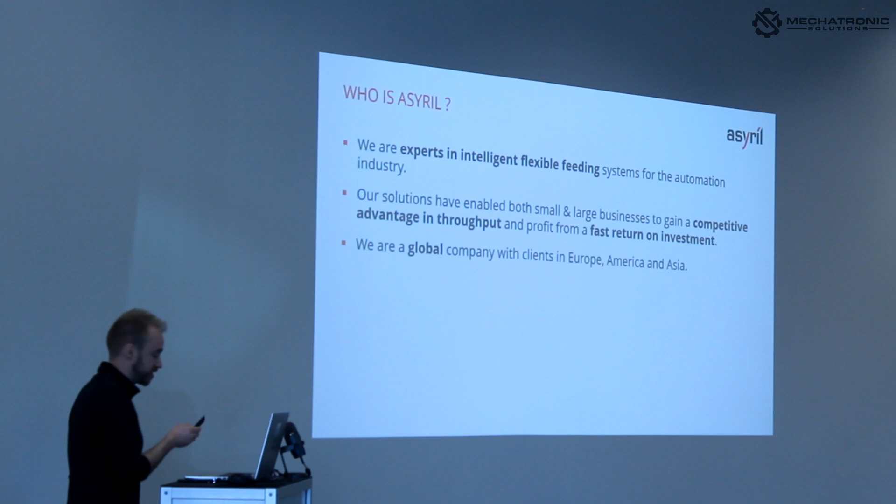I will get to specifically what we do in a minute, but we are a global company. We started in 2007, and we now have 60, actually approaching 65 employees. This slide's a few months old. We've also very recently opened an additional 5th office in Germany.

So we're headquartered in Switzerland. We've got an Edina office 25 minutes south of here, and we've got Singapore, Japan, and Germany as well.

So Asyril is a flexible feeding company. We make these feeders that vibrate parts around for pick and place. We actually started in 2007 with a big Delta robot, which slowly moved into a smaller Delta robot.

And then we made this in 2011 cell for palletizing with our ASYCUBE and a Delta robot in like a little package cell. But as we started to grow and realize where our fit in the market was, we decided not to compete with these super precise small robot companies like Mechatronic and to start just focusing on the flexible feeding because we really had a niche product there.

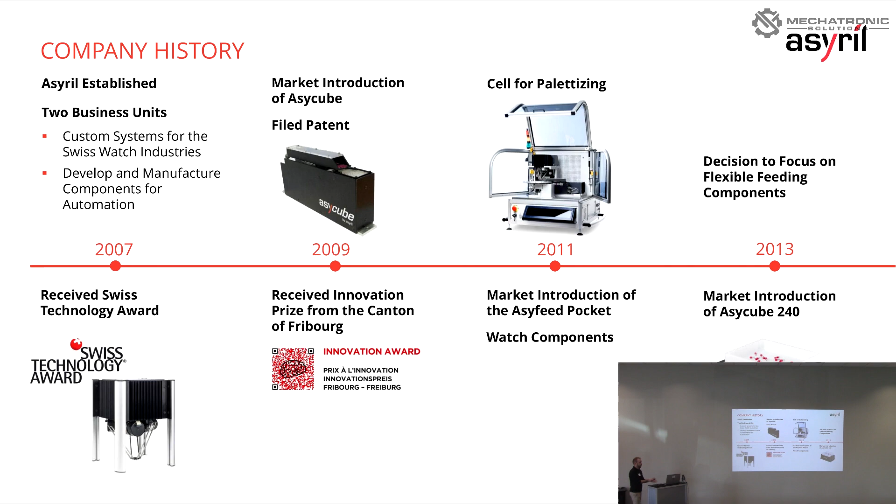We actually have a patent on our 3-axis vibration technology. So we decided to really focus in on that and kind of stop producing robots. Now we're a complete flexible feeding company and control system that we add as well.

So moving through the ages to speed it up, we opened up this center in Edina, which I am now the manager of, and Connor is one of our application engineers. That was in 2019. I started at the very beginning of 2020, so I've been here for 3 years. At that moment, we introduced our control system for ASYCUBE, which we call EYE+.

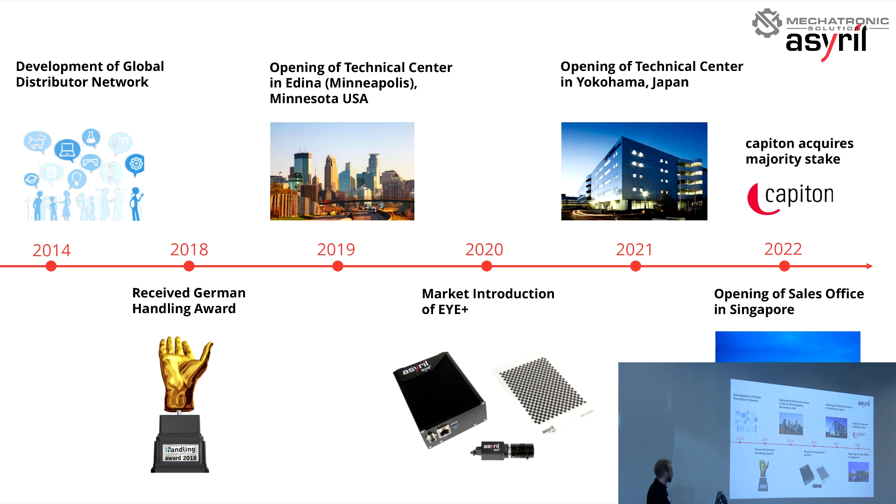Then moving through the ages again, we opened up a couple more offices in Japan, Singapore, and now Germany. Very recently we became acquired by a company in Germany called capiton because they want to help us grow even faster. When I started 3 years ago, we were 30 people, and we're already almost to mid-60s.

So, what is flexible feeding and what's the problem in production? Well, you have to get parts from bulk typically and spread them out into a singulated fashion so that a robot can pick and place and automate the parts.

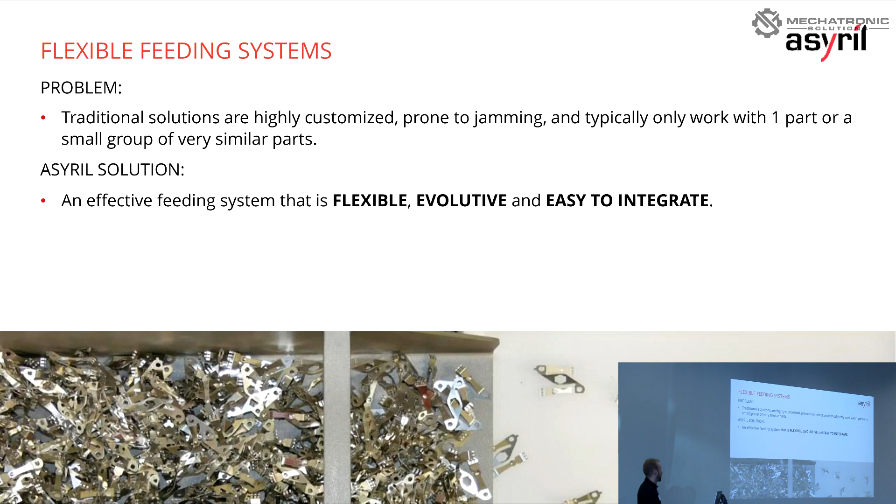The problem is that most traditional solutions are either highly customized, expensive, prone to jamming, or typically will only work with one part or a very small group of very similar parts. Our solution is to have an effective feeding system that is flexible, evolutive, and easy to integrate. We want to be able to run all of your parts maybe with one machine.

So I'm going to give you a quick summary video here of what we're about to go over in the next 30 to 40 minutes, but this will kind of sum it up for you.

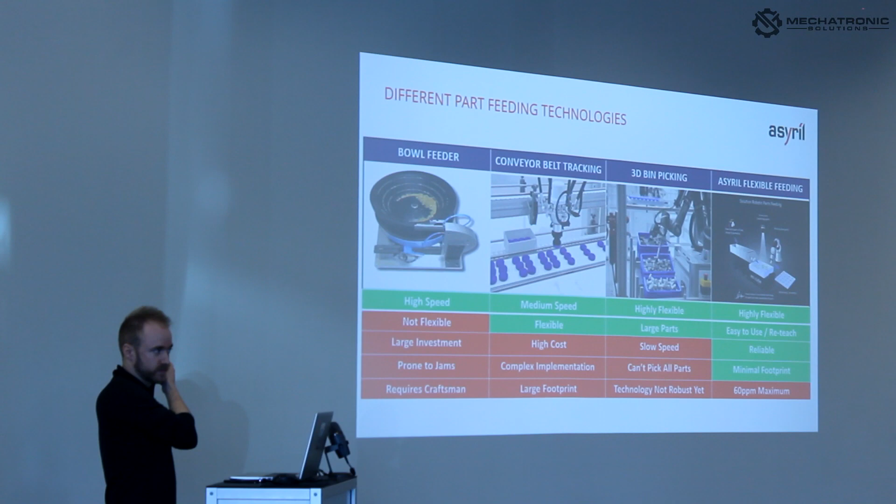Actually, I'm curious, how many people in here have never even heard of flexible feeding in general? So you're all pretty... two? Okay, but most of you are pretty familiar. What about Asyril specifically? Anybody not heard of Asyril? Oh, cool. So I'm talking to a bunch of experts here.

Well, our technology, the one on the far right, which we call flexible feeding, is kind of complementary but a little bit competitive to these other technologies. Traditionally, bowl feeding is always kind of the tried and true method. It's high speed. You can design a bowl to spin up just about any part, but they're not flexible. They're really designed for one specific part, and you can't really do super tiny parts.

So they're also prone to jams. They require really specific craftsmen to kind of fix. From there, there's also conveyor belt tracking, which are a little bit slower than bowl feeders, but they're also quite flexible, though they have large footprints, a bit more complex, and higher cost.

You have 3D bin picking technologies, which are cool, but I think they're not quite there yet. They're much slower speed, and they can't pick every part from the bin usually, but they are highly flexible and can handle very large parts.

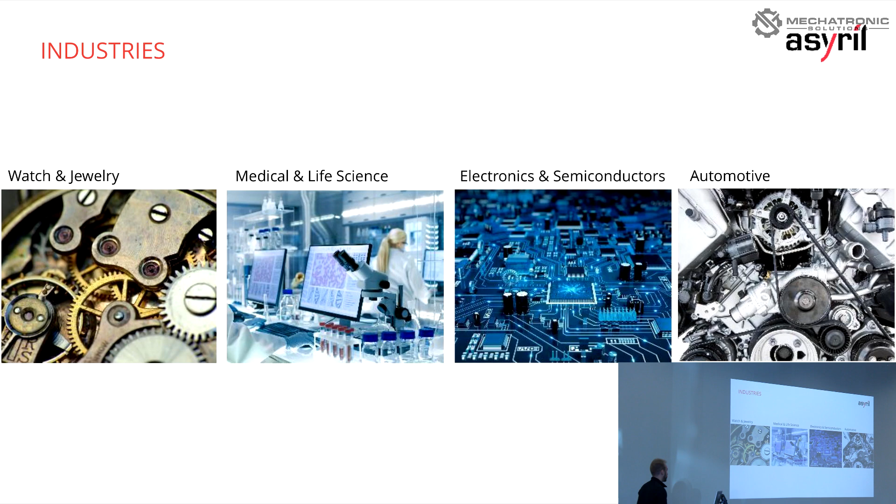Asyril, being a Swiss company, started in the watch industry. That's where we got really big with tiny watch parts, assembling parts for companies like Rolex. Then branching out to the US, we built our med device market share because Minneapolis is the hub for that. We also do a lot in electronics and semiconductors, and now even branching into larger parts in automotive.

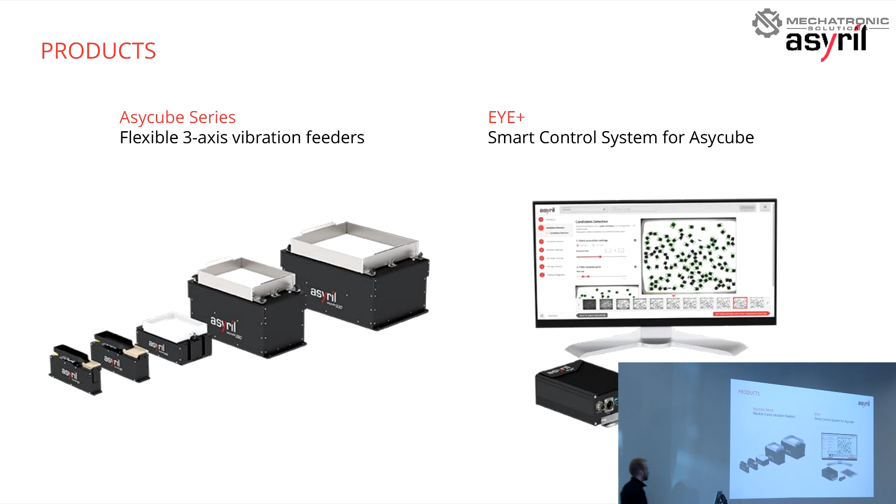So in summary, Asyril makes two products: our ASYCUBE series of feeders, and our EYE+ smart control system, which is designed to be the partner with an ASYCUBE. Connor will talk about EYE+ in a minute. I'll go into a bit more depth about what ASYCUBEs can do for you first.

ASYCUBEs have what we call 3-axis vibration technology, where we can vibrate parts in literally any direction we want. This is unique to us and we have a patent on it. They're meant for rapid changeover and flexibility, obviously it's in our name, and they're meant to be really easy to integrate. Across our 5 sizes, we can handle parts anywhere from about 1/10 of a millimeter to about 6 inches.

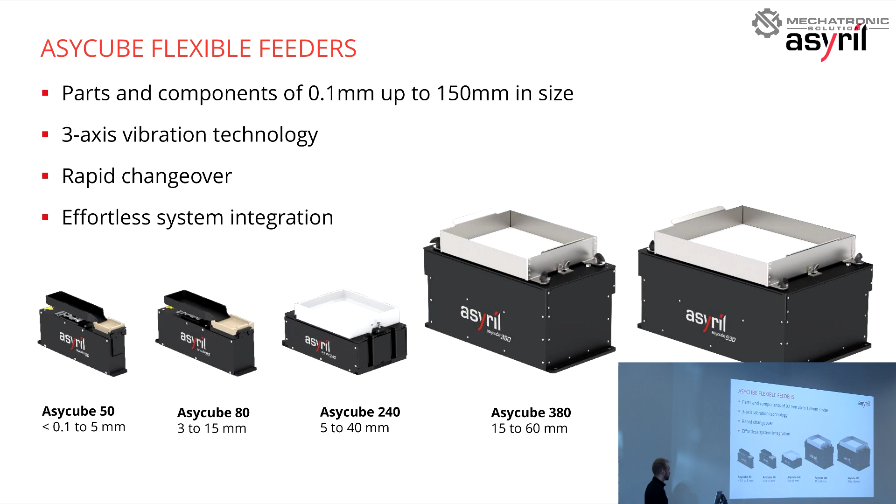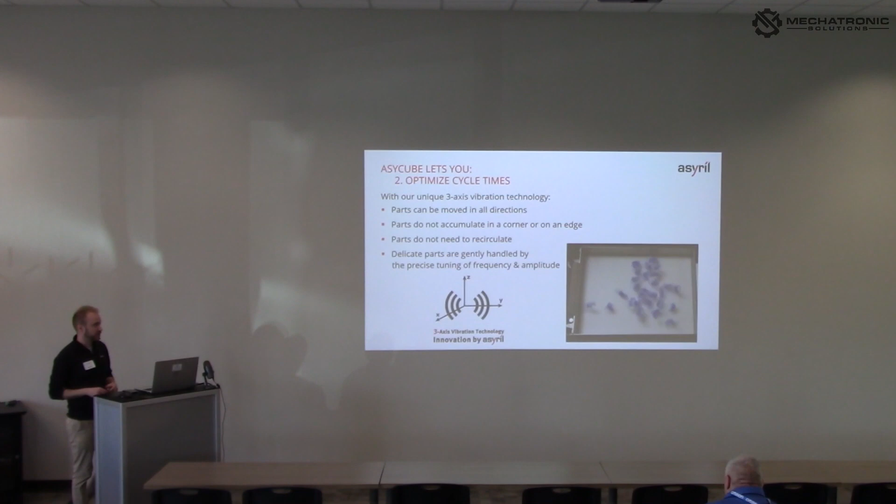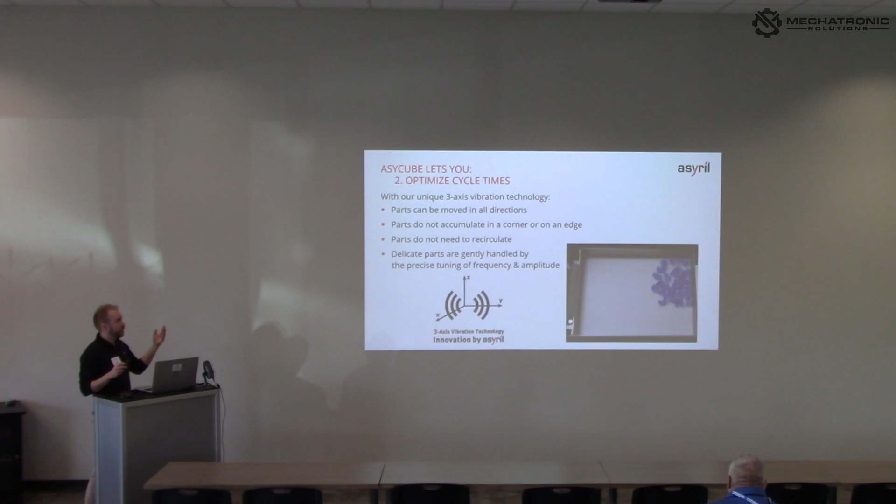Here's what I mean by this 3-axis vibration we have a patent on. We can move the parts in any direction across the feeder, and you can do that with or without feedback. Connor will talk about that, but our vision system can actually detect where the parts are and bring them away from the edge. So if they're clumping in a corner, it brings them back to the middle. Why is that important? If you don't have parts piling up in the corner, and instead you're evenly spreading them across the whole platform every time, you're maximizing your chance for them being pickable, and ultimately maximizing your chance for a high cycle rate.

Here's one more video really highlighting that. You'll see this robot come pick and place the parts, but then you'll see someone manually push the parts off to the corner, and the camera will recognize they're in that corner and bring them back to the middle. This is all happening automatically, and adding that kind of control manually with other vision systems is a bit more in depth. So this is how we make flexible feeding also very easy.

ASYCUBE also lets you detect parts with high precision. Each ASYCUBE comes with an integrated backlight, and we also have optional front lights we sell in case a part really requires some additional lighting. You can have many different colors of backlights for precise part detection.

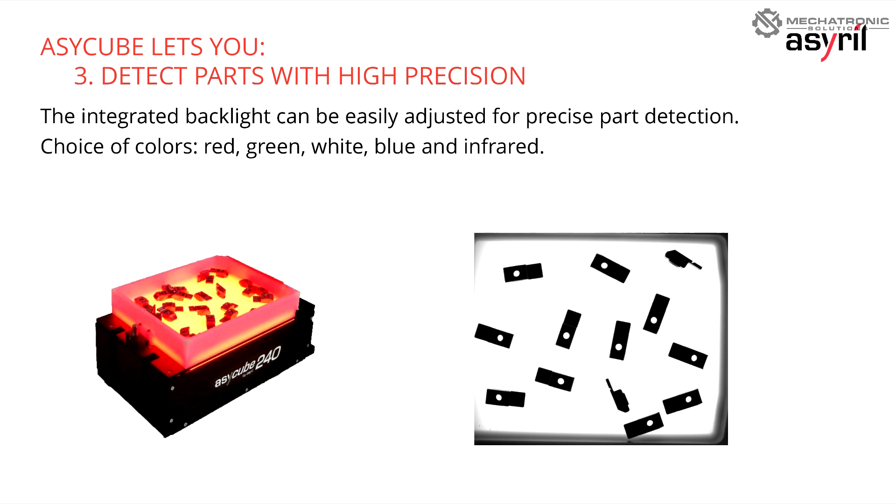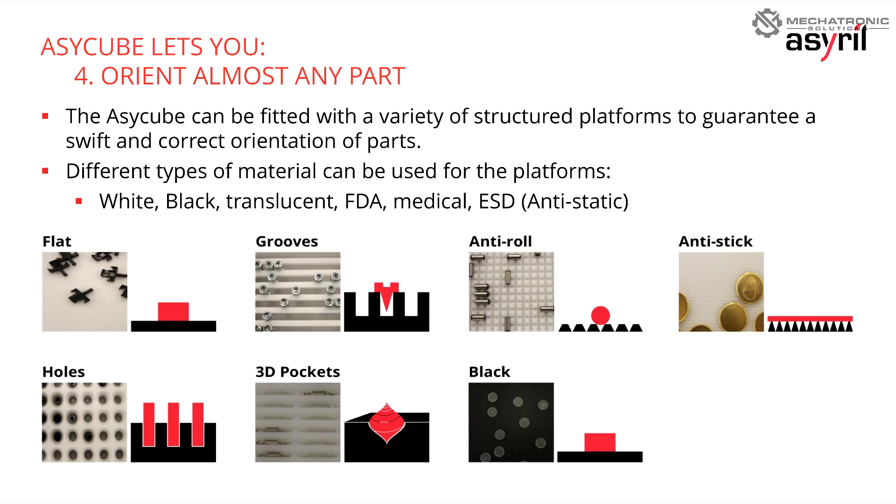Another example of a useful platform is an anti-stick plate, where we have micro grooves to reduce surface friction on the top. So if you have a part like a coin, we can make the parts move more efficiently. And when you can make parts move faster, you can get them to the middle faster, spread them out faster, and again increase your cycle rate. ASYCUBE also lets you orient custom parts, like these pins that require a slot to be held by a flange, or these cylinders that need a hole to be oriented vertically.

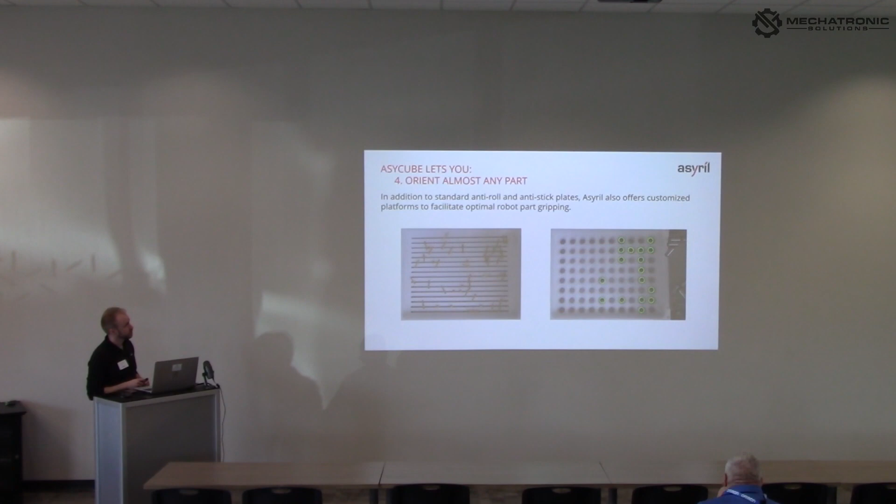ASYCUBE also helps you reduce changeover time. We have a super easy way to change over platforms with 4 thumb screws on our larger ASYCUBEs, and a simple 1 mechanism plunger for our small ASYCUBEs.

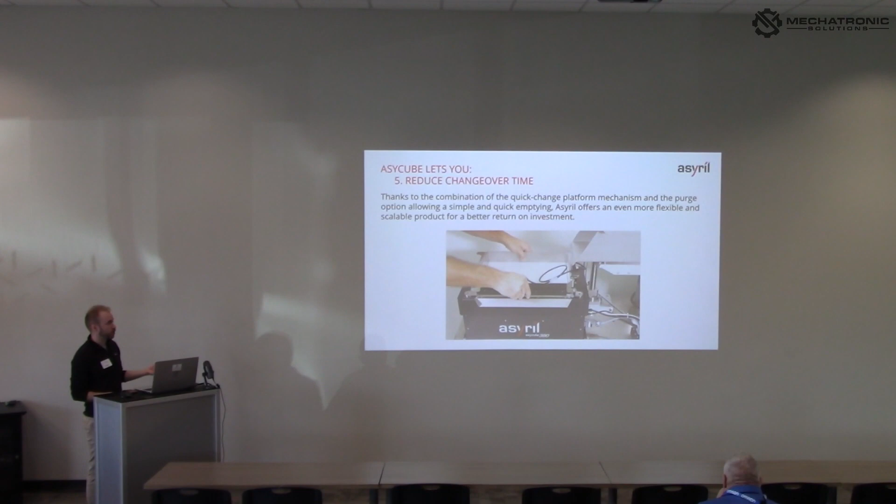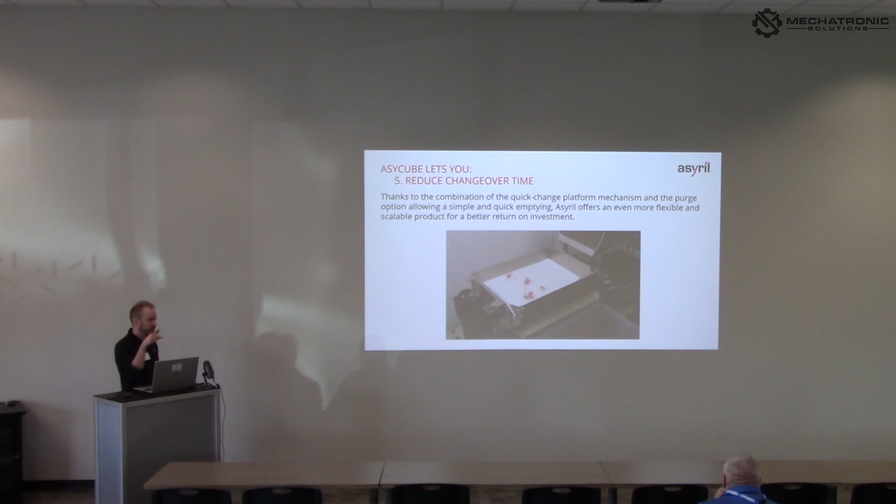ASYCUBE also lets you very intuitively configure it. Our goal and mission at Asyril is to make feeding simple for any user, so you don't need to contact support, your integrator, or your distributor. You can really configure stuff pretty easily on your own.

We're trying to change the game in software interface, making it as user-friendly and intuitive as possible. This is the software that you get with an ASYCUBE. You load it up and configure what we call the tuning parameters.

There's a laser on here. These tuning parameters let you configure the amplitude of an ASYCUBE, the frequency at which they vibrate, and the duration. These are important because a really heavy part or set of parts on an ASYCUBE would behave a lot differently than a bunch of really light parts, so they require different frequencies in order to behave at their resonance and actually travel across the platform.

So you can do live tuning, where you set the thing to vibrate continuously and adjust these tuning bars until the parts are moving really well. You can tune an ASYCUBE with no experience, probably very well, in under half an hour.

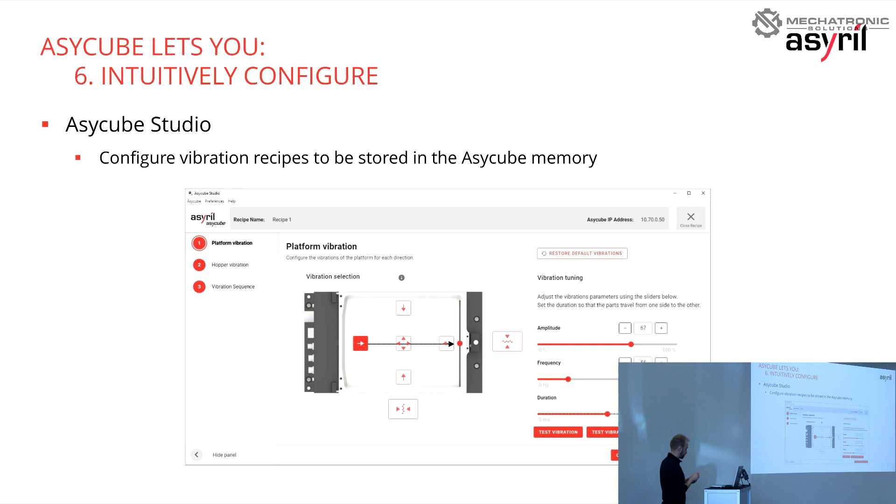Inside ASYCUBE Studio, we try to do everything simply. We have wizards to guide you through how to set it up if you've never used the software before, and we have real-time response to the vibration parameters, as I just mentioned.

We have optimized hopper management and smart centering. We can partner with third-party vision systems to have 2 parameter inputs where they send us the quantity of parts. You'd send the quantity over and say, I've got 7 parts left on the platform, but you told me 50 was the optimal amount, so I'm very underfilled and need to send a longer hopper vibration command to refill. The idea is you're always keeping an optimal fill level on the ASYCUBE.

So we can do that with third-party vision, and we can also do smart centering. We have a parameter where you can send the center of mass from your Cognex camera or something, and then use that information as a trigger to say which direction the ASYCUBE needs to vibrate to bring the parts back into the middle.

It does get a little bit involved, and Connor will talk about how EYE+, our control system, makes this literally automatic. The idea is that there's no experience required to use an ASYCUBE.

I do have a video showing a recipe creation, but I think that's maybe not necessary unless anybody really wants to see it. No, we'll just stay high level, so we'll skip over that.

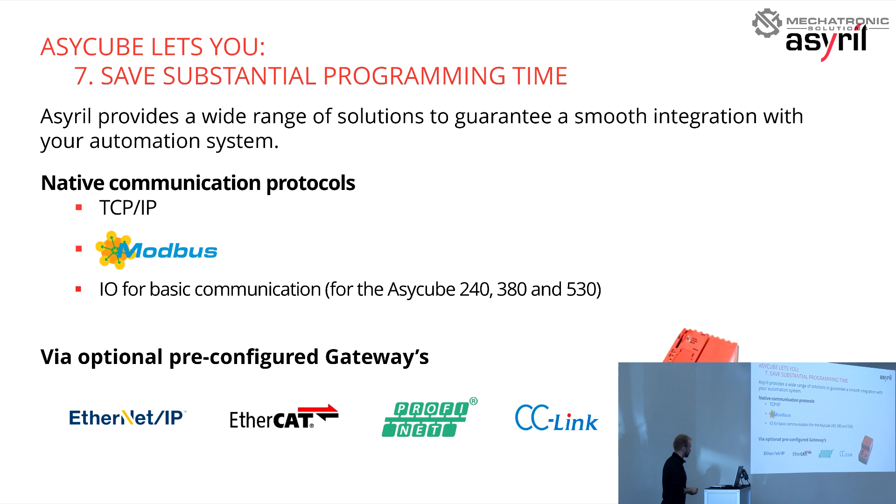ASYCUBE also helps you save programming time with our plugins. We have plugins for every major robot brand, and we're also compatible with others. We actually developed plugins with drag and drop commands to make ASYCUBE control even easier inside these. Here are a couple example teach pendants from different robot brands.

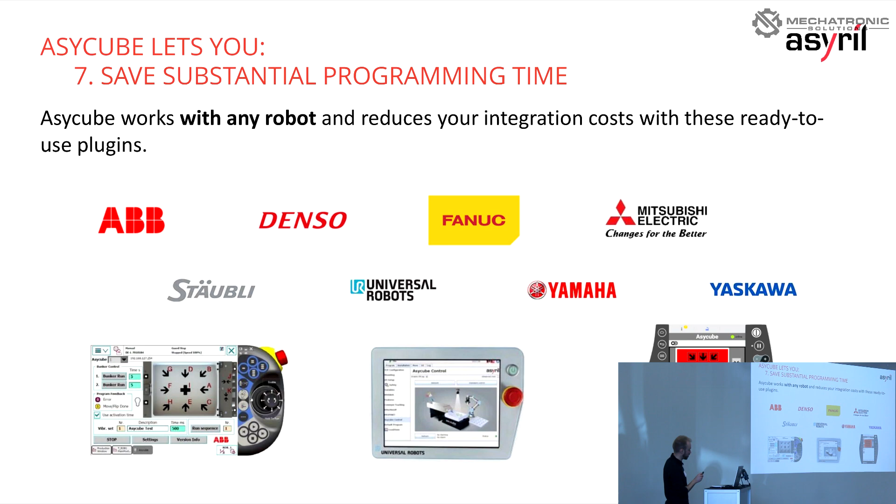So that's flexible feeding in a nutshell, and our ASYCUBE family in a nutshell. I'll take questions about those at the end. I'm going to let Connor continue on with our EYE+ product, and then we'll go from there. Thank you.

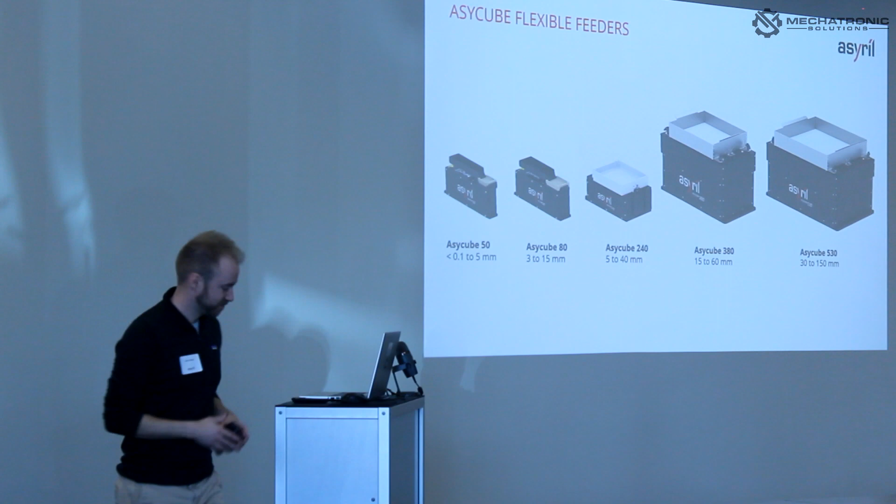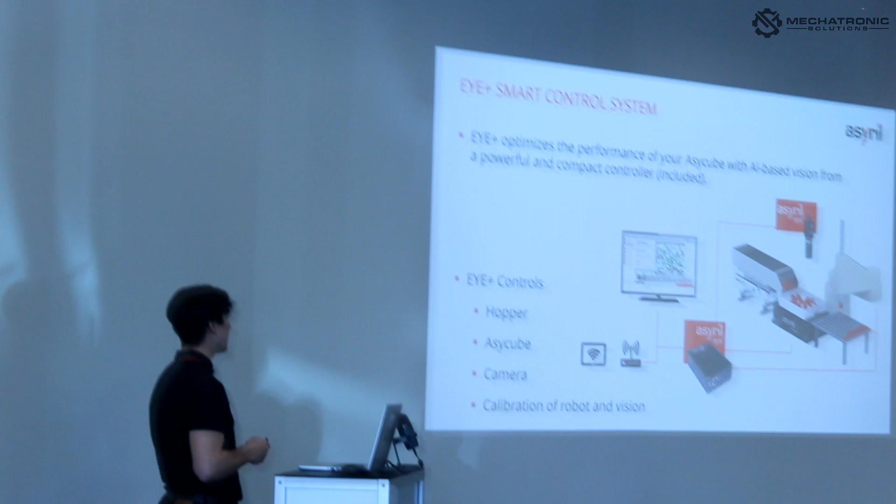I'm going to go over our EYE+ smart control system. It's a vision control system that Asyril has developed to work in tandem with the ASYCUBEs, like Josh has said before. We put a large emphasis on ease of use, compatibility, and configurability. So what is EYE+?

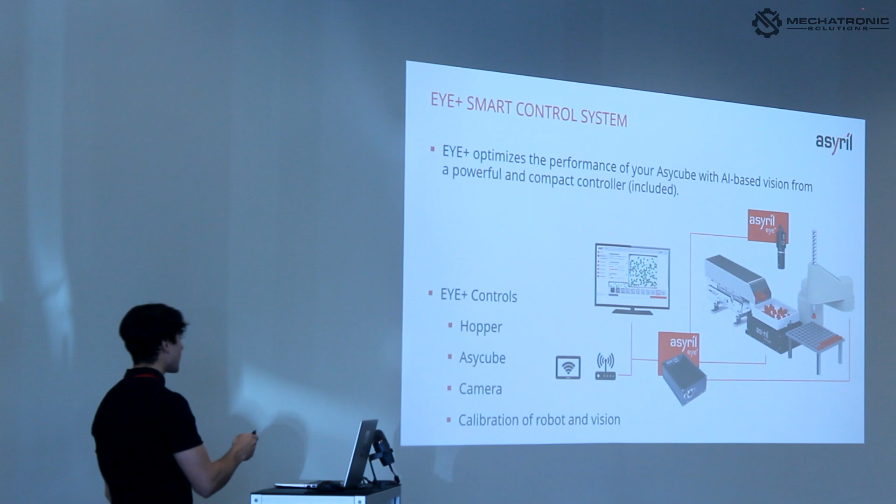EYE+ Smart Control commands the hopper, commands the ASYCUBE, commands the camera, and also has easy setup wizards for calibration of the robot and the vision system. The nice part about EYE+ is that you do not need to communicate to both your vision system and the ASYCUBE system separately. You just communicate to a single EYE+ controller, and that'll manage everything on the ASYCUBE, keeping your lines of communication as easy as possible.

What's in the box? The EYE+ system comes with a camera and a lens. We use predetermined lens and camera configurations, so you don't have to look too hard on which lens and configuration may be required for your application. We have a set quantity that we found to work best with, let's say 95% of parts. In specific applications, we do have tools that enable you to accommodate other parts, like mirrors and whatnot, but those could be discussed independently.

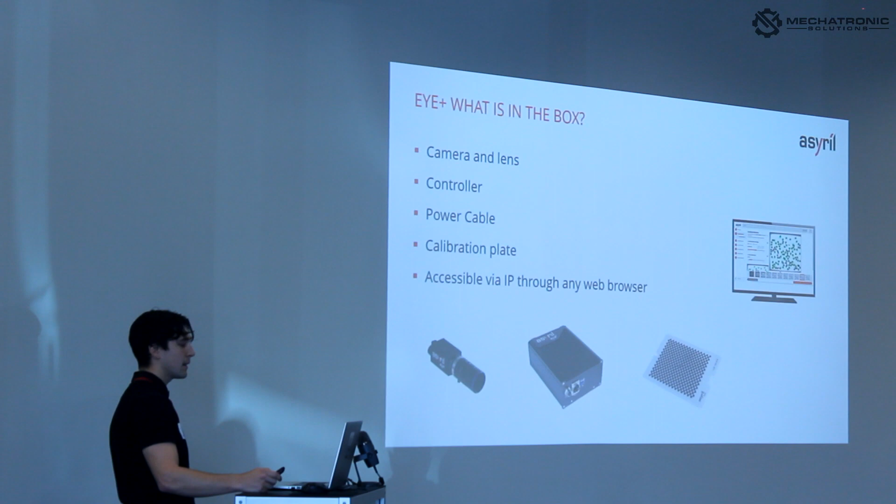It comes with the controller, a power cable, a calibration plate, as you can see on the bottom right, and it's accessible via IP through any web browser. So as long as you have a computer, you don't need an internet connection, you can operate on EYE+'s network and connect to it via its IP with an Ethernet cable.

We like to think that EYE+ is a fun, out-of-the-box experience. As plenty of you are probably aware, industrial vision and part picking in general can be a complex problem to solve. There are definitely more complex solutions as well, like line tracking or bin picking. So we like to do the best that we can to ensure that EYE+ is easy to use.

There's no previous vision experience required. It's easily integrated, speaks TCP IP, Ethernet IP, EtherCAT. We have hardware items that can be included to communicate Ethernet IP and EtherCAT. It natively speaks TCP IP, a direct cable connection. All the cables come within the kit. It's accessible with any browser, like I said before.

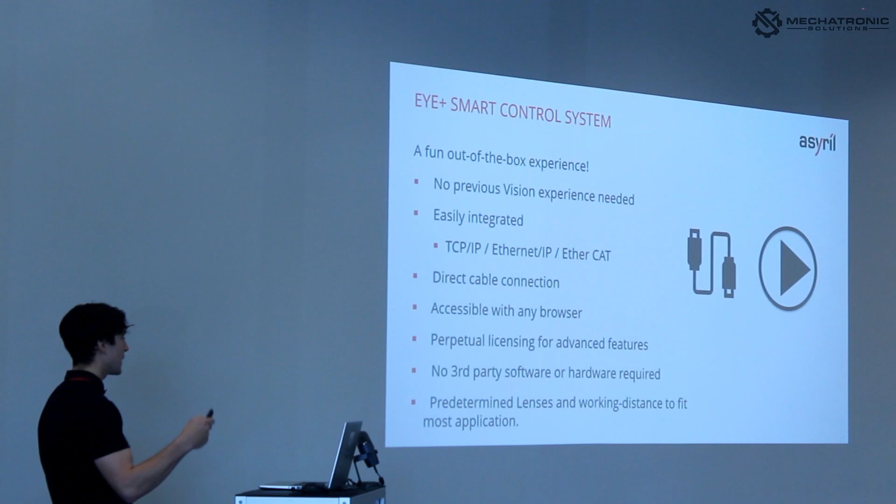It has advanced solutions like dual feeding and multi-model, which I'll go over later. It's a one-time perpetual license, so you don't have continuous licensing fees to pay. EYE+ is not a licensed software, it comes with the controller. Once you purchase the controller, you get the benefits of EYE+. There's no third-party software or hardware required if you do not need it. And then, like I said, working distances.

Like I said, we put a large emphasis on ease of use, and by doing so, we have a built-in camera calibration wizard to calibrate the camera to the ASYCUBE plate. We have a built-in robot calibration wizard, and a wizard for recipe creation that walks you through the vision teaching and ensures you have a solid result you can depend on at the end.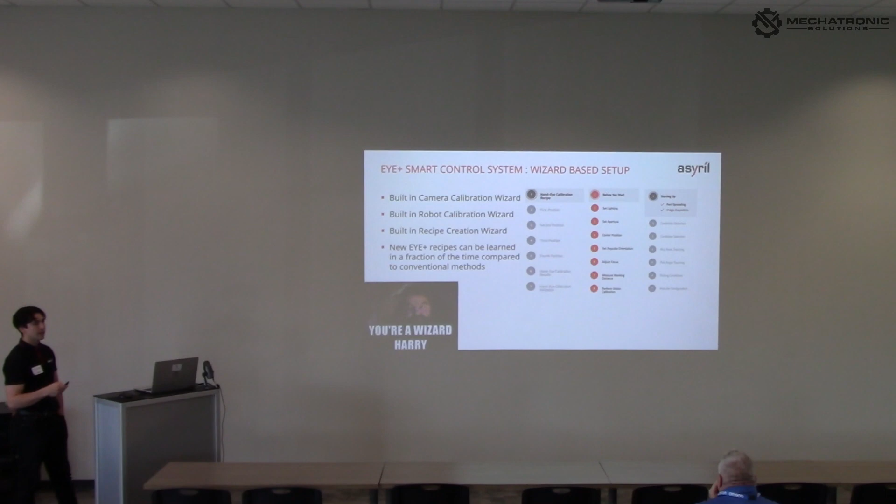And it's rather quick. Typically, it takes me less than 15 minutes to build a recipe. If you're a beginner user, maybe 30-45 minutes. But if you know what you're looking for on the specific parts, which geometries are important, that'll typically take not much time at all.

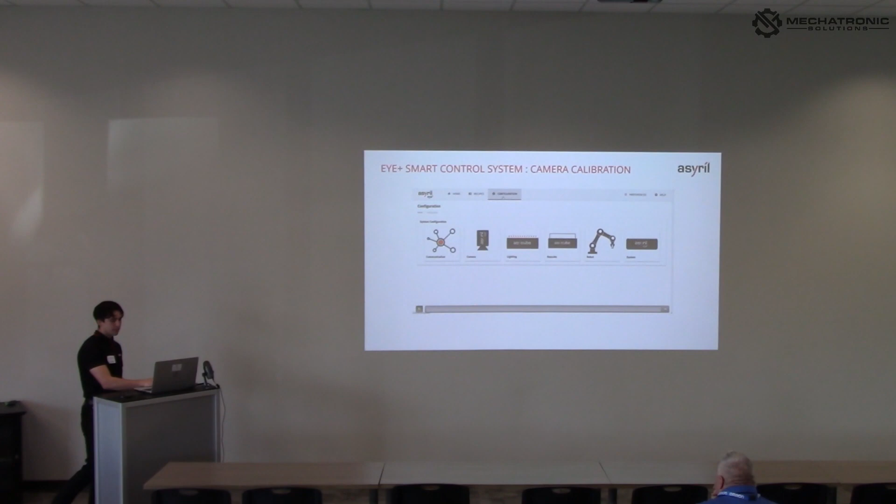I'm just going to show a quick video of what a camera calibration procedure looks like. I believe it's about 3 minutes long.

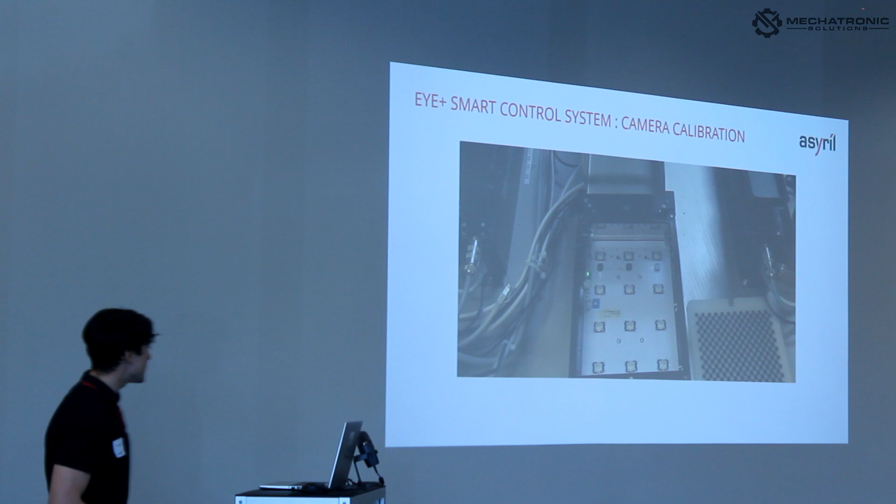This is our setup wizard like I discussed. As you can see, 9 easy steps. Set everything up and the system will configure itself quickly.

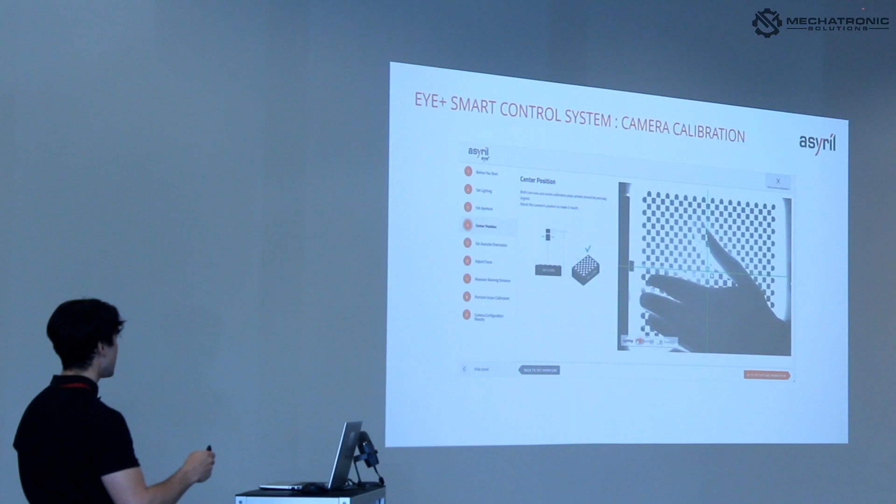Each of our lenses comes with a recommended starting aperture. Obviously, each application might vary, but we have good starting points for adjusting your aperture. And your focus is a little bit more obvious in the next steps, but for an extremely precise application, sometimes it works best to focus on a specific object instead of trying to set your focus on the grid pattern itself. Let's say a very small font, something along those lines.

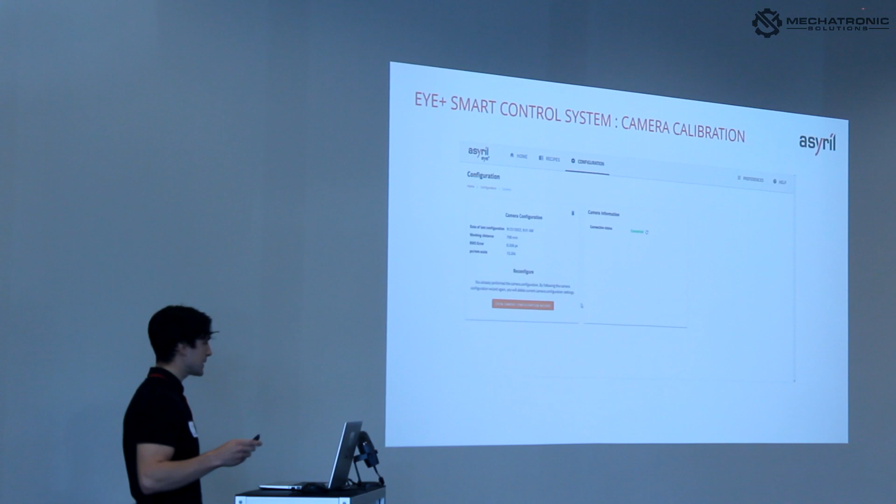So as you can see, that's a pretty quick process, a really easy to use wizard. Makes it more or less a painless, fun experience.

This is a robot calibration procedure. Similar wizard setup, steps through, I believe, 6 steps, and this helps you calibrate your robot arm to the ASYCUBE to ensure that your pick and place accuracy is consistent.

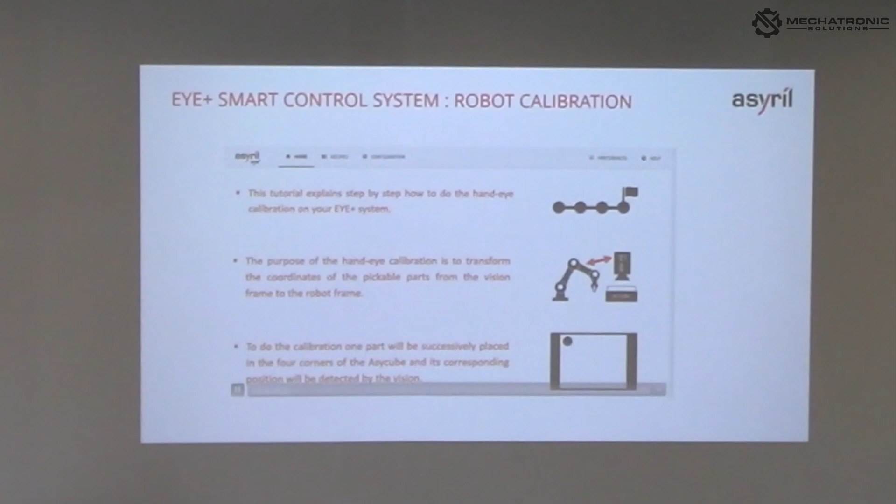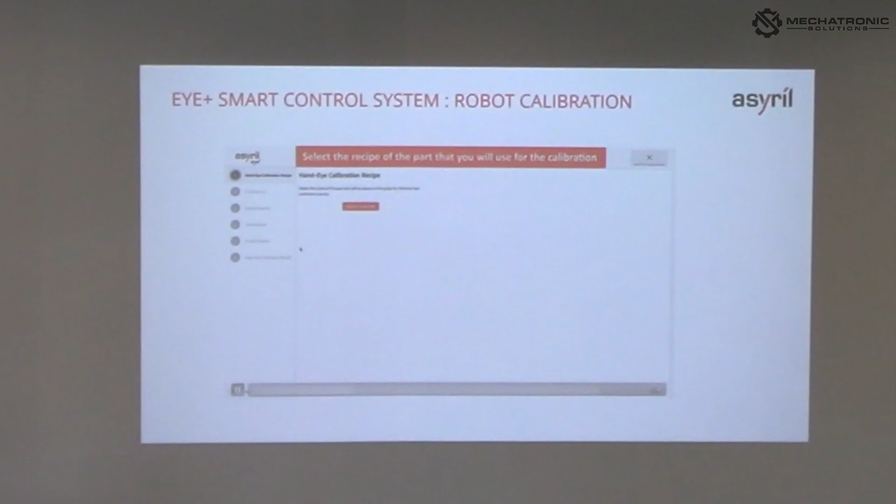What's going to happen in the video is to calibrate your robotic arm to the ASYCUBE. You'll need to place a part in each corner. The robotic arm you'll record your robotic coordinates into the wizard, and then move the arm out of the field of view. You'll take an image of your calibration part on the platform. Once you've taken the image, it'll marry the robotic coordinates to the ASYCUBE coordinates that it's picked up when it's taken the picture. You'll do that in each corner, and then it'll give you an accuracy at the end, so you'll know if it's going to be consistent enough for your application.

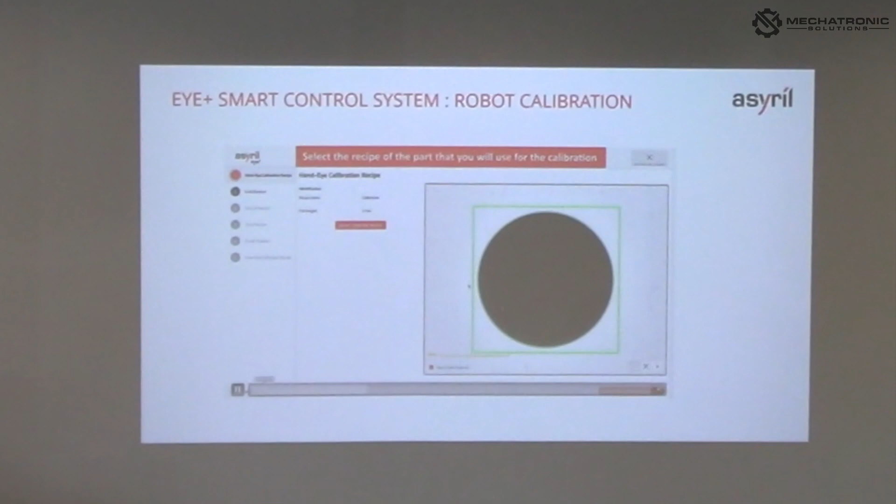So to save you guys some time, I'll let you see what the robotic arm placement looks like on the first position, and then I'll jump to the next one.

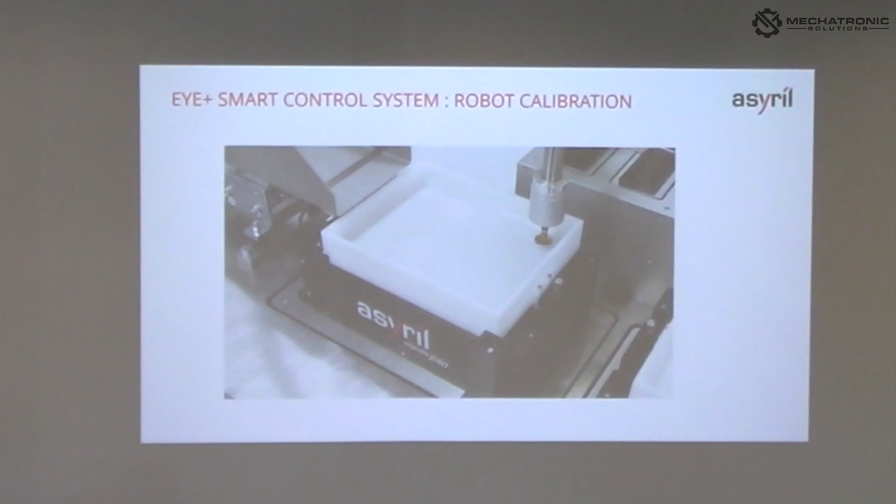This is also a process within EYE+ that can be completely automated. We have tools within EYE+ that allow you to send the robot coordinates in autonomously, so you can have the robot calibrate itself. Typically, this is what we'll do in a production application if you have to calibrate before production every day or on part changeovers. It makes it easy to use, easy to do - simple as sending a start calibration command.

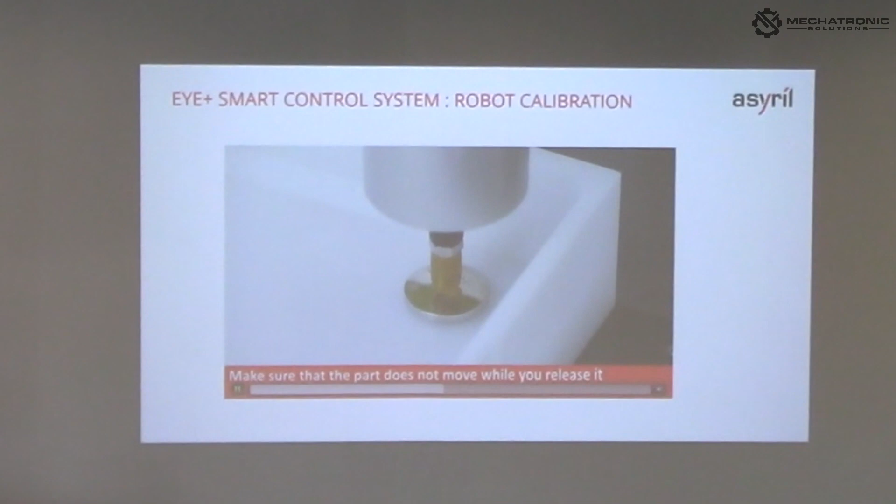Finally, our recipe creation wizard. This takes a little bit longer, and I didn't feel like making you sit through a video of that. But if anybody's interested, Josh and I will be out on the floor after this, and we can show you what that would look like. It's a rather quick process, 7 quick steps for starting up.

The second step is setting a size limit around your parts. You need to tell the system how big your parts are, more or less, based on their area. It's going to use that as the first filter.

Third step is candidate selection. This is actually an AI teaching step where it's picking up on surface finish differences between each part on the platform, and you as the user will teach it what a good part is by sorting through a handful of images, sorting the good ones into a column on the right and the bad ones into the column on the left. You swipe left for the bad ones, swipe right for the good ones.

The fourth step is pick point teaching. This is assigning a pick point, a general region where you're going to want to pick your parts from. You're going to want to highlight important features for this step that pertain to your robotic pick. So if you're using a vacuum gripper, it's going to look different than if you're using a finger gripper type of situation. For pick angle teaching, this is assigning a pick angle to the part, so each part is going to be picked at a known angle, and then can be placed accurately after.

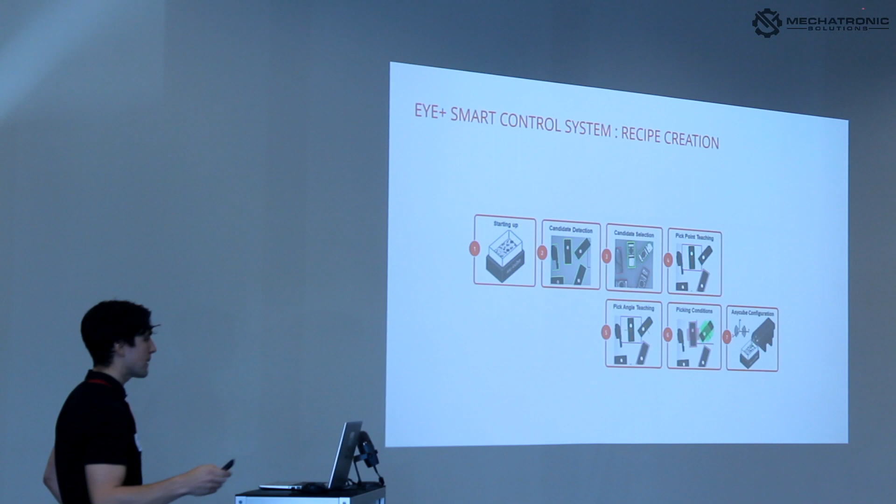Picking conditions is setting boundaries for your robot so it knows not to collide with the platform and not to collide with other parts on the platform when it's going to pick parts. You'll set a boundary around it, and a gripper size - typically you'll try to make it look as similar to your gripper as possible. That will ensure the robot will never attempt to pick a part that may cause a collision. You'll also set a boundary along the outsides of the ASYCUBE to ensure the gripper will never cause a collision with the frame of the system.

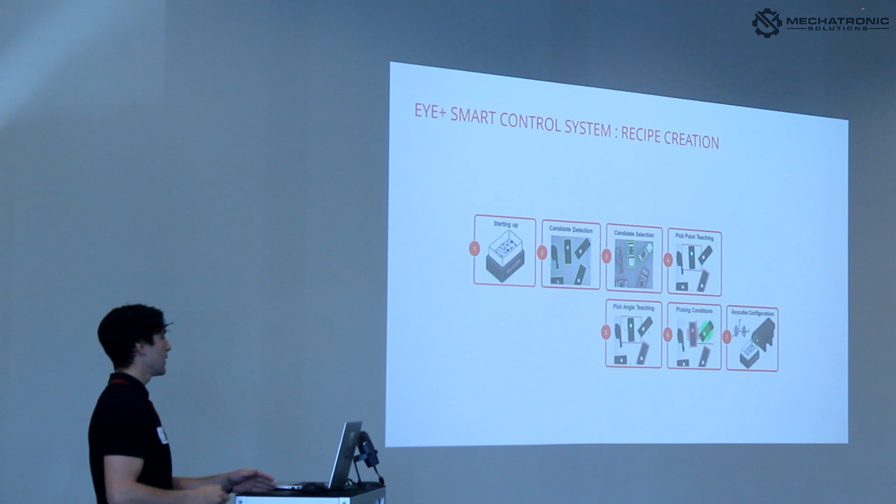And finally, like Josh showed before, you'll go through the tuning and tune the ASYCUBE just like you tune on ASYCUBE Studio, or tuning in general, to customize for each of your parts.

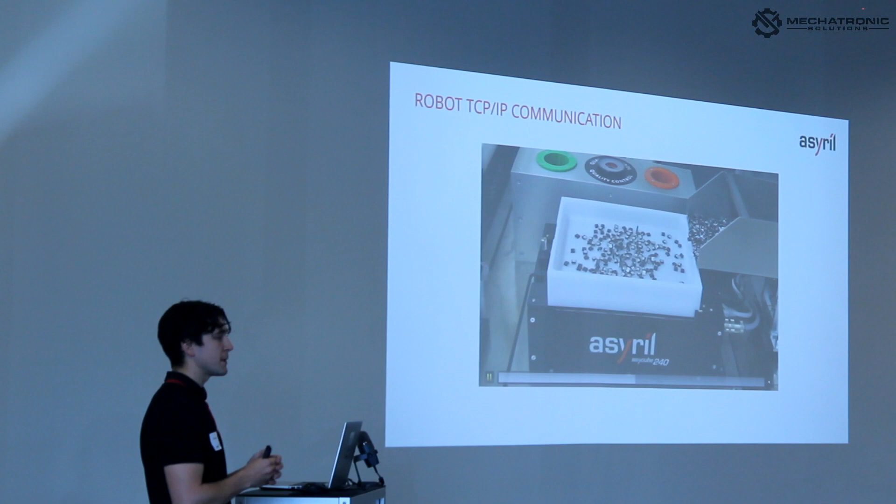For systems that we do not have plugins with, it's just as easy, except you need to define these variables. You need to tell it what a get part is, you'll need to tell it where, and the various other commands that you would use. But for a standard application, all you're going to do is start.

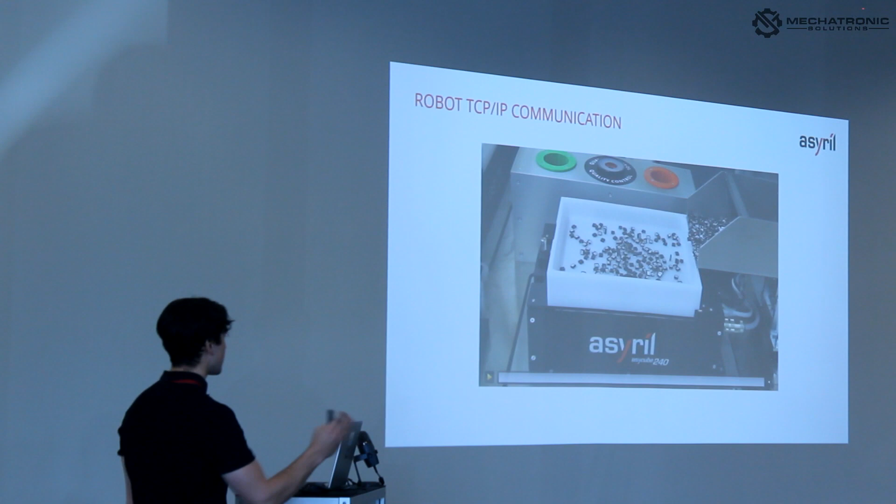You're going to start production with a recipe ID. Your robot's going to tell the system to get me a part, so get part. Once you've told it to get part, the system's going to take an image or shake the tray if it needs to. It'll take an image, determine if there's any good parts. If there's not, it'll shake it. If there are, it'll send those coordinates to your robot to be picked. And then you'll just loop that cycle to continue picking.

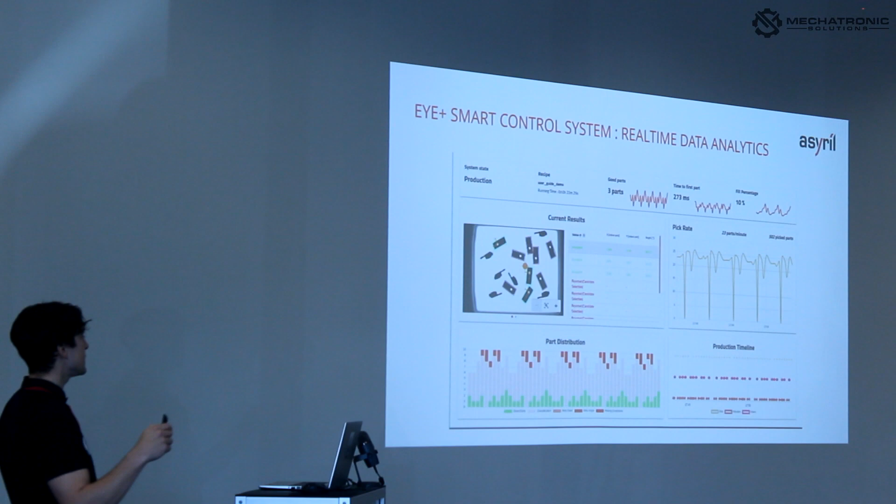Another nice tool of EYE+ is real-time data analytics. On our production homepage that you can pull up via IP address, you can access the real-time analytics to see what your production run rate is - good parts per vibration.

Good parts per vibration, that'll tell you how many parts are typically turning up good after each vibration interval. The time to first part in milliseconds, this is the time that the vision system takes to locate the first part. It does this rather intelligently. It's going to put an emphasis on the first part to get your robot moving. So it's going to locate the first part as central to the center of the ASYCUBE, and then it's going to loop out kind of like that, as it locates the other parts on the platform. And this kind of gives us the quickest time to part that you can achieve.

And then it'll also give you fill percentage to see how consistently the system is keeping the ASYCUBE at its fill rate. Other things as well, like pick rate, things like that. Anything that you may be interested in.

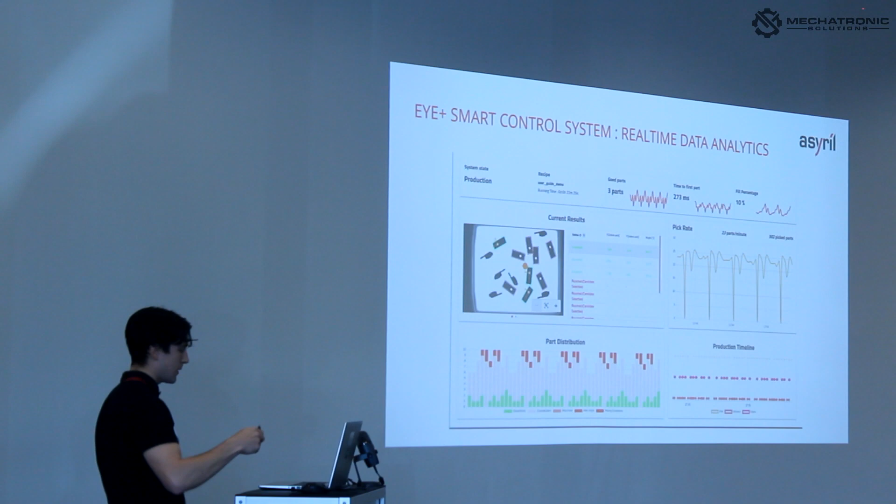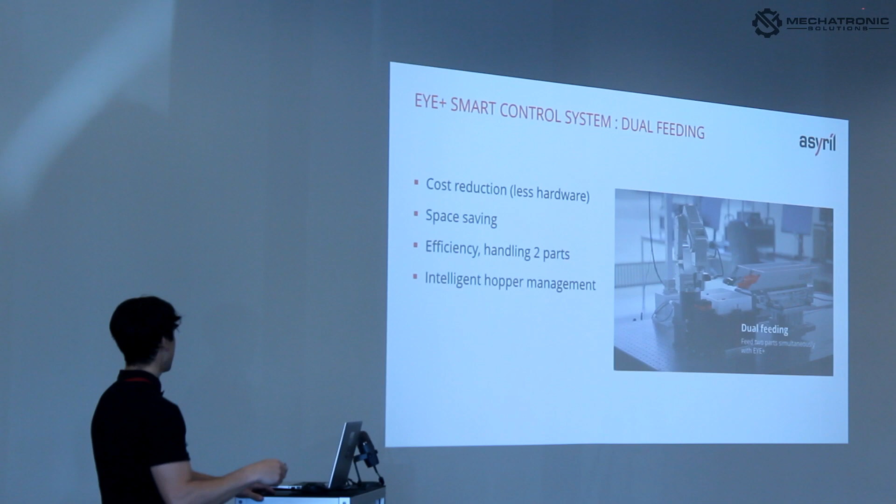A couple of our advanced tools that we offer for EYE+ specifically are dual feeding. I believe Josh brought it up earlier, but dual feeding is feeding two parts on a separated platform. Like earlier in the video, we saw that rivet application, grab the rivet and grab the head. That's a good application. Dual feeding is going to be a good space saver. Typically, it'll be efficient. You'll have intelligent hopper management to keep both sides of the platform optimally filled. One downfall that you might see with dual feeding is your cycle rate will take a hit as you have a reduced working area.

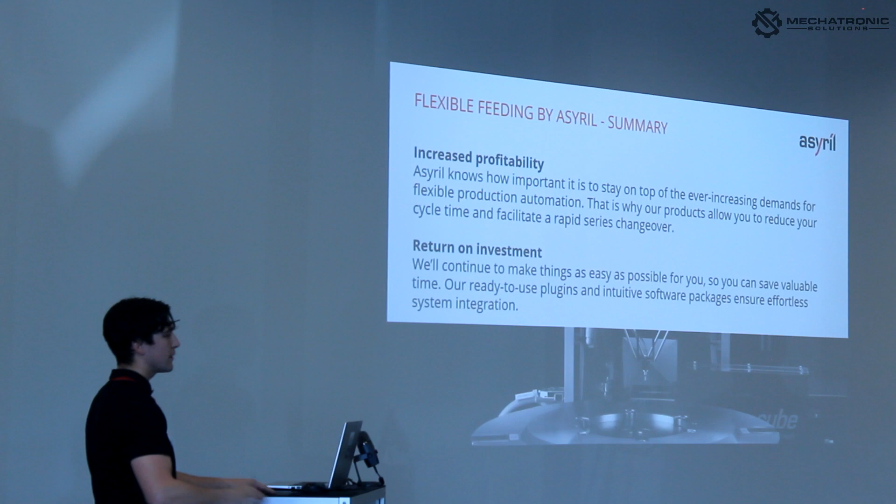So as an overall summary for Asyril and what we do and our place in the industry, we try to help you guys increase profitability by enabling automated solutions, allowing robots to pick the parts they need in the orientation they need them for assembly. And in certain cases, we make it easier than the competitors. And the return on investment is quickly seen. The cost of our products is, I would say, middle range for the solutions. But the fact that you can take a small project, turn it into reality, and then duplicate that to get to the cycle time that you need makes it an easy tool to prove out if your process is going to be capable or not.

And some nice benefits if you choose Asyril. We do free feasibility testing, so if you have any parts or any applications that you think would be a good fit, we have a lab in Edina that you can send the parts to, and we'll give you a full report on how they perform, the cycle times, and the vision analysis. And we also offer our expertise in flexible feeding. We have Josh and I, as well as a large engineering team that helps figure out how the system could be optimized. We work with you to achieve the target that you need to hit. And we have a lot of industry experts in Switzerland that help us make it possible.

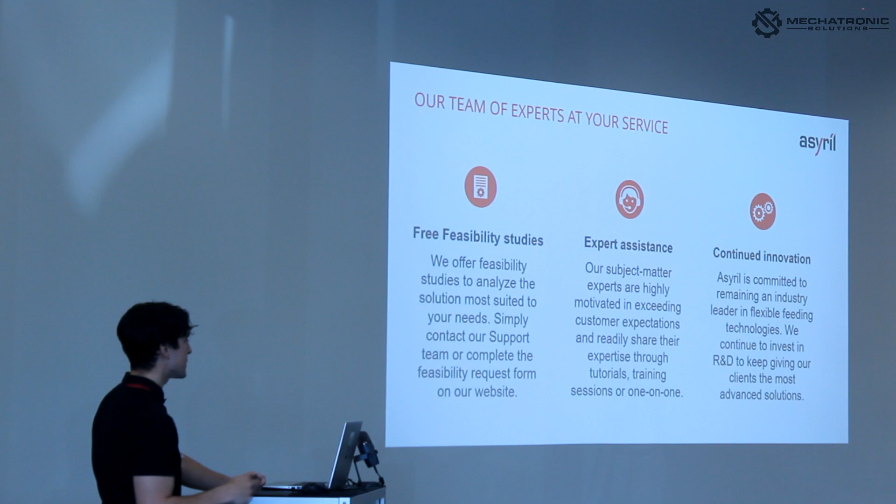And we continue to innovate. We're basically, like Josh said, a relatively small company, 65 current employees, about 45 of which are all engineers. We do a lot of R&D and development in our Swiss facility. We're kind of focused on being more of an R&D development company. So in that fact, we have a lot of brain power to help solve problems and innovate new products.

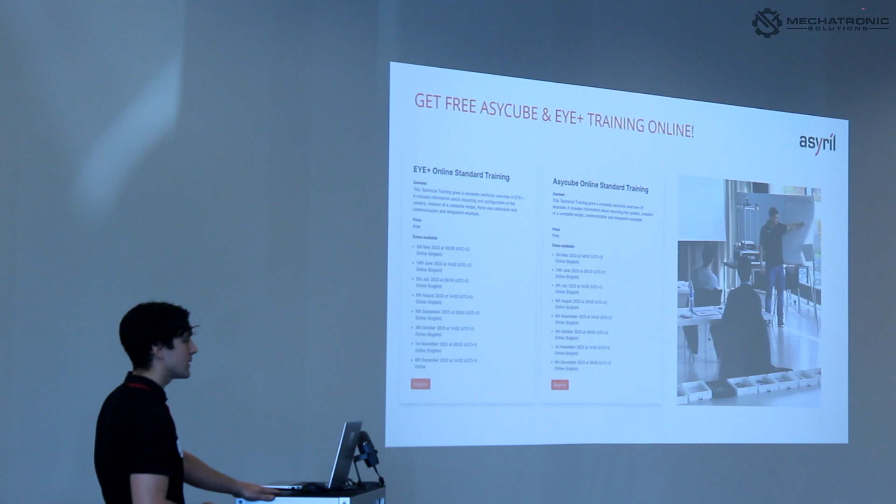And then we offer free training on EYE+, free training on ASYCUBE. That's all online. Josh and I are also a support staff in Minneapolis, so if you have any Asyril-related questions, we have some emails. We also have some business cards out there if you're interested. We can hand those out. But you can contact us during regular business hours, and we'll do our best to help you out.